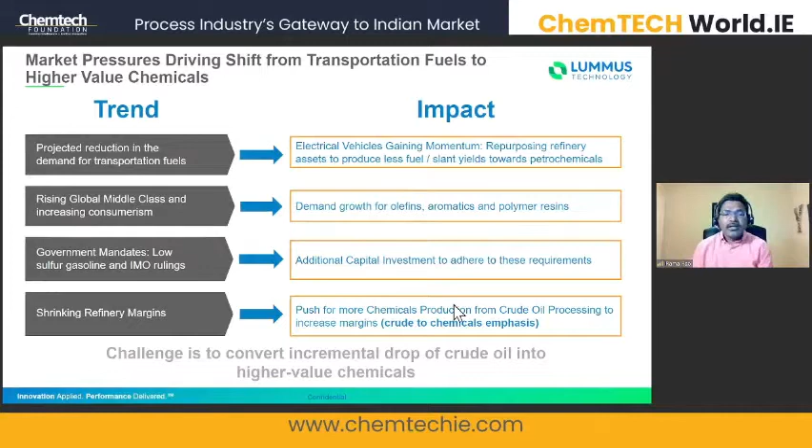So it is important to move towards producing chemicals from crude, which will help enhance the profitability of an existing refinery complex. However, the challenge is to convert the incremental drop of oil into high value chemicals. There are various issues that we need to take into account. The question of refining and petrochemical integration has to be seen in synergy, because we have to repurpose the existing refinery assets to provide petrochemicals that are high value for the refiners.

So great integration doesn't mean co-location. There are a lot of things to be taken into account, such as low cost feedstock, lower transportation costs for feedstocks, fuel sources, existing infrastructure, and downstream markets like polyethylene, polypropylene, etc. Also complementing refining and petrochemical integration by exchanging molecules for reprocessing, and providing some opportunity to share the required utilities.

There are two anchors for oil to chemical projects, known now through a lot of publications and leading conference discussions. One is carbon rejection, the other is hydrogen addition. Carbon rejection means it is mostly the FCC as secondary processing, which you are seeing on the left side. The feed is prepared from the crude unit, from the HVGO to the naphtha to the atmospheric tower bottoms, including treating some residues and processing the coker oils either directly or hydrotreated, making them into light olefins.

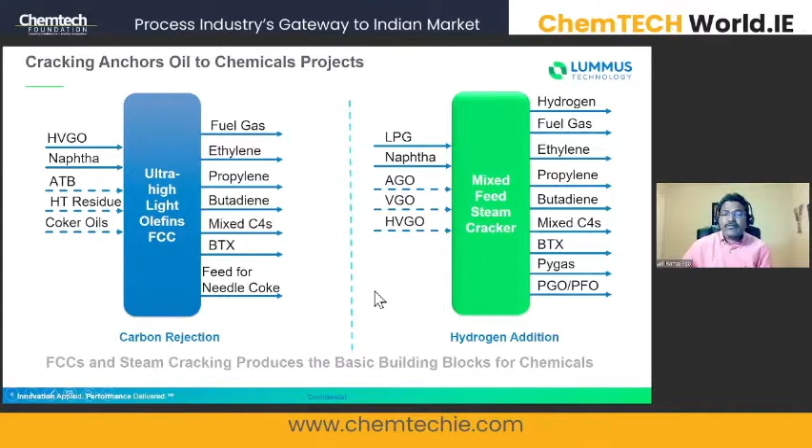It is very important to have a deeper understanding of the molecules. Earlier we used to talk about the range of the products, like gasoline and diesel boiling ranges. Now we are talking about the refinery and petrochemical complex in terms of the molecules, small molecules in particular, starting from C2 to C4, and also the naphtha or pyoil. The naphtha means BTX-rich naphtha that I'm referring to. Many of the processes are licensed by Lummus Technology in this domain as well.

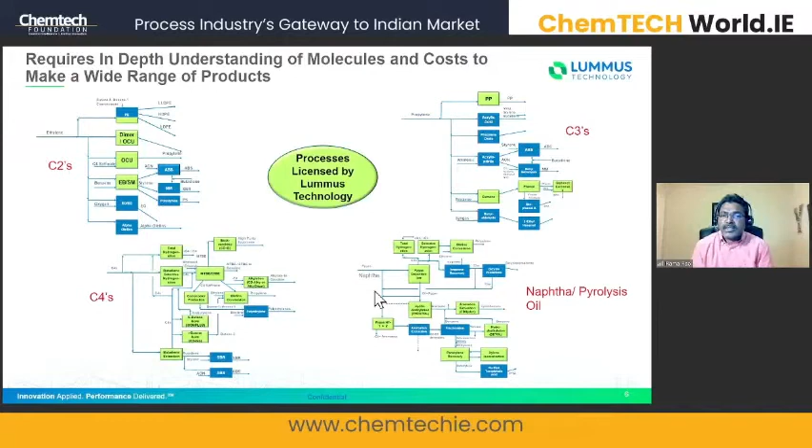The other important consideration is the feed, which is the crude source and type. All crudes are not equal to be processed as a source of petrochemical production, because paraffinic and light crudes are preferred, and access to sustained light crude availability for a long time is a very important aspect to be considered for profitable margins continuously. Regional crude and product pricing mechanisms and logistics are another aspect that has to be taken into account.

As regards the impurities, when we process these crudes, impurities such as Conradson carbon, metals, sulfur, and nitrogen are going to play a big role in the profitability of the refinery and petrochemical complex. Therefore, it is important to effectively deal with these impurities. We also need efficient dealing with the bottom of the barrel, because depending on the crude type, we may have primary conversion or separation to the tune of 30 to 60%. The remainder has to be upgraded into these light molecules. That makes it a big challenge to make it more profitable.

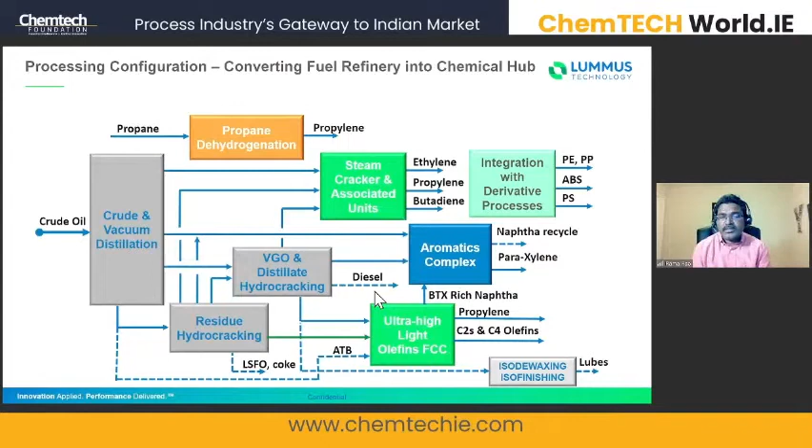This slide is a recap of the previous slide, where the refining complex is typically associated with two types of secondary processing: one is hydrocracking or hydroprocessing, the other is FCC. Another important aspect considered is the residue conversion approach, depending on the type of crude, the byproduct values and synergies between these processes. So it is important to consider residue conversion approaches to make refinery integration to petrochemicals more attractive.

On the right side, you see the petrochemical additions. As we saw in the previous slide, the light olefins FCC and mixed feed crackers are the anchors essential to produce these light molecules for the chemicals, including the feed preparation for these two units. As we are talking about a large range of molecules as feed, some intermediates will be generated, and there could be some waste streams. It's important to monetize these co-products using processes that complement the refinery and petrochemical complex. One such process is olefin conversion technology, which uses C2 and C4 light olefins in a metathesis reaction to produce a higher amount of propylene, for example.

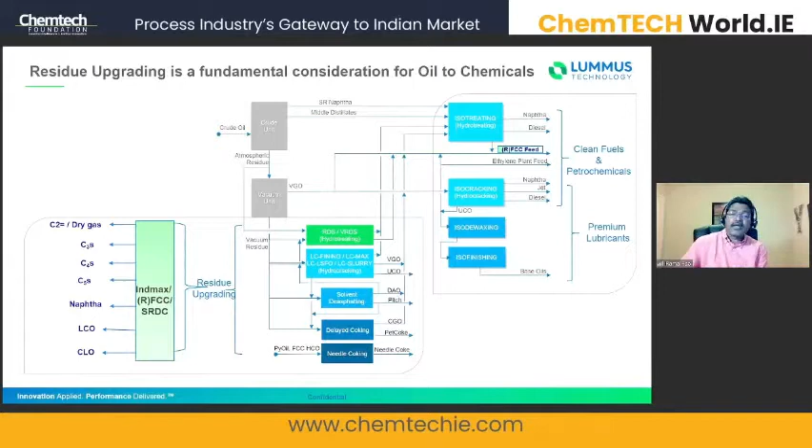As I mentioned, whatever crude that we get, no matter what we do, there is a significant amount of the residue that is still available, and that needs to be upgraded. So therefore, the secondary processing and upgrading all those heavy molecules into the suitable feed, either into the FCC or into the steam cracker, is going to become an important activity that makes things lucrative for the refiners.

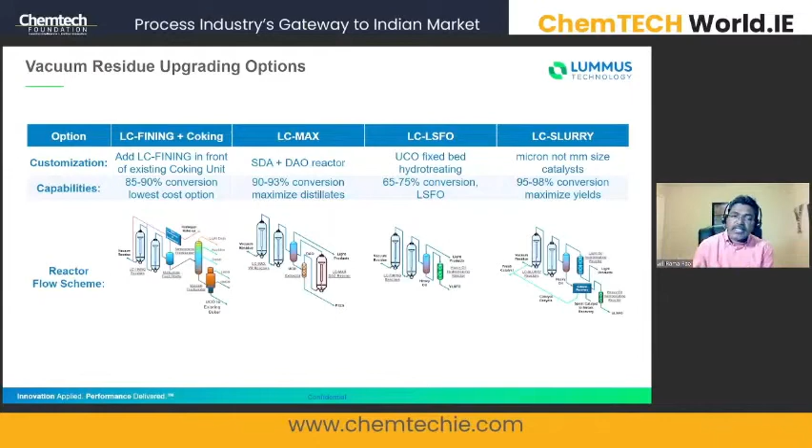So there are a couple of options here for upgrading the vacuum residue into the light olefins. This includes LC-Fining, coking, LC-MAX, several things, ranging the conversion from 85 to 98. The other route that we were talking about is the carbon rejection, where the ultra high light olefins FCC is involved.

Lummus is one of the leading licensors in FCC technology, and in high olefins FCC technology in particular. We have about 70 units licensed around the world. We have active R&D with state-of-the-art pilot plants. We have a joint collaboration with IOCL R&D, the technology partnership for the INDMAX FCC.

Many of you may be knowing the INDMAX FCC was originally developed by IOCL R&D, and we, Lummus, collaborate with them for global licensing as well as design and engineering support. So IOCL R&D brings in the innovative INDMAX catalyst that is developed indigenously, along with the process concepts that are employed in the FCC technology offered by Lummus, with the design and engineering know-how, and we are at the forefront in licensing

of this technology. And I'm glad to indicate that we have about 10 units licensed so far, and 6 since 2018. The point I want to emphasize here is the industry is going from a refinery making gasoline from FCC into producing a very large amount of light olefins, such as propylene, ethylene, and butylenes, as well as high aromatic naphtha that is important for the aromatics complex.

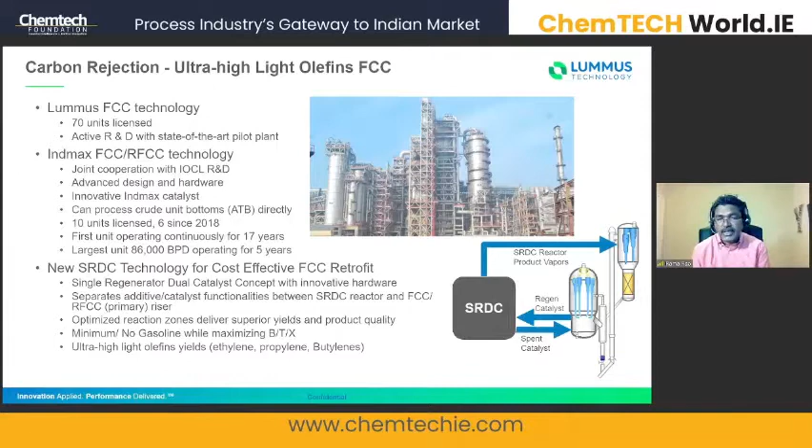In the secondary riser, which is the SRDC riser, ZSM-5 is the primary catalyst, and it is concentrated there to enhance the product yield and selectivity from the SRDC, which is processing gasoline or naphtha as the recycle from the primary FCC. So this enables us to optimize the reaction zones to deliver superior yields and product quality. And this is a mission that will minimize gasoline and maximize the light olefins and BTX-rich naphtha stream.

The other aspect that Lummus has been working on for several years is the crude to chemicals, TC2C. It is basically a partnership along with Saudi Aramco and CLG, our own joint venture. The focus was developing, commercializing, and marketing innovative crude to chemical technologies using hydrogen addition as the platform. The combination involves hydroprocessing by CLG, ethylene cracker technology by Lummus, and the proprietary TC2C technology by Aramco. The objective is to produce high value chemicals by minimizing operating and capital costs.

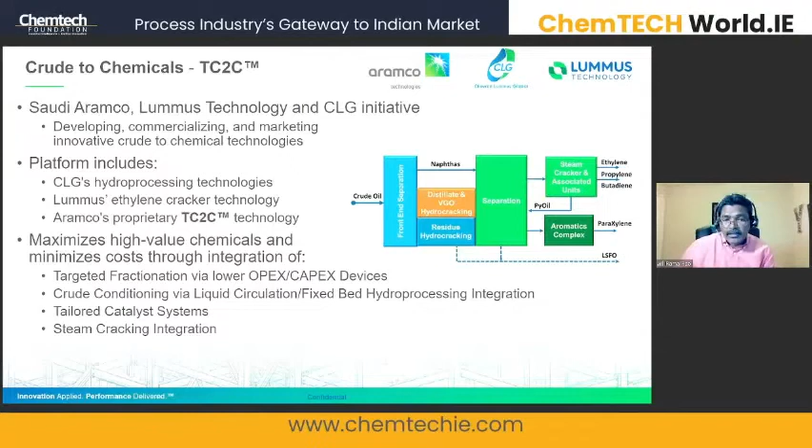At the same time considering crude conditioning with a simplified configuration, tailored catalyst, and steam cracking integration. These kinds of configurations have been implemented, and we are continuing to develop more to make it more cost effective. This is going to play a big role in that endeavor.

Before I get to the conclusion, Lummus is responding to these needs through innovative solutions for converting crude into petrochemicals, and driving solutions to convert residues to chemicals is a challenge we have always been working on. We are supported by 4 R&D centers around the world and excellency centers as well, and there are new configurations to provide improved yields.

Low cost and high chemical yields are achieved through the things I mentioned: carbon rejection and hydrogen addition. The TC2C is one of the hydrogen addition options, and expanding conventional technology applications into new areas, SRDC is one of them. Shifting gasoline to light olefins and BTX is also a prominent research area that we took up.

We have commercialized the technology with one of the leading US refiners, who is fuel focused as of now, and is moving into large scale petrochemical complexes.

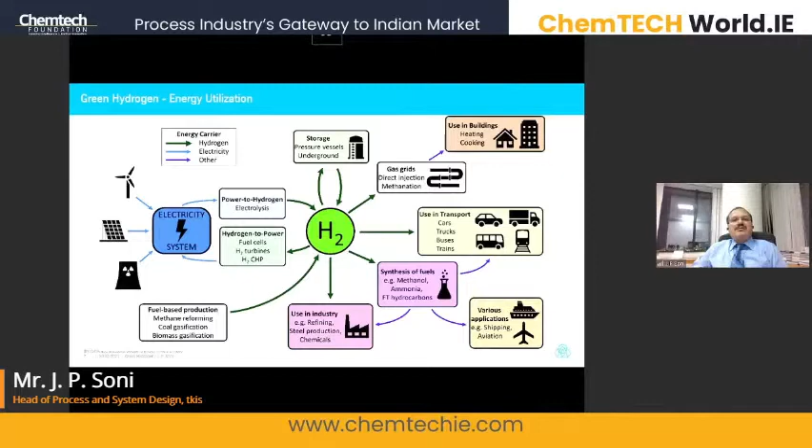And as explained in the opening remark by Mr. Jain, in India also the government is taking a lot of initiative to facilitate this green hydrogen. Worldwide, this hydrogen can definitely act as an integrator of renewable power to the end user, either in the form of direct consumption, or in the form of various chemical production. And the support coming from various government agencies will definitely make this possible in terms of utilizing this green hydrogen, I'm sure.

In this slide, although it is slightly less readable, this is just to depict the whole value chain of hydrogen, what all we can do. Just to explain in brief: as this is a renewable energy source, we can produce hydrogen either centrally, in the areas where abundant renewable energy is there, or in situ at the various chemical complexes. This hydrogen can be supplied for processing to the various industries.

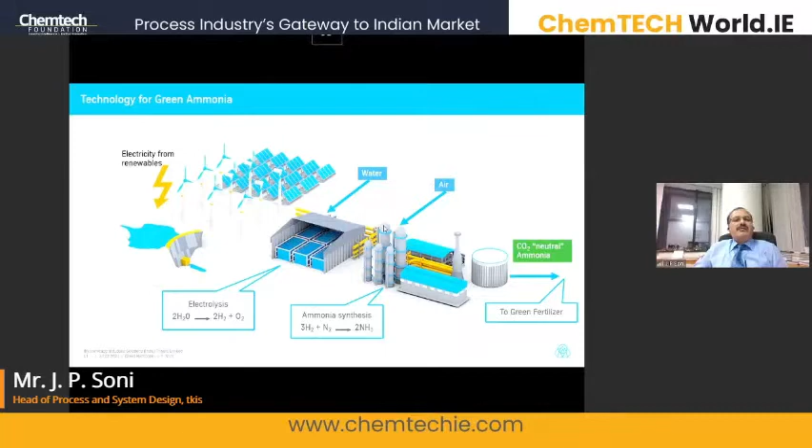Coming to the various technologies of producing green hydrogen through water electrolysis, there are three major technologies available worldwide. First is alkaline water electrolysis. It works on the principle of circulating alkaline water to the cell, which is separated by a membrane. So you separate hydrogen and oxygen into different compartments, and the alkaline water is circulated back to the cells after enriching.

Similarly, there is another technology called Proton Exchange Membrane, or PEM technology. It splits the water by passing it through a proton conductive solid polymer, splitting the water directly into hydrogen and oxygen. There is a third technology which splits water in the form of steam. The steam is passed through the catalytic converter, so high temperature electrolysis happens here, and we get hydrogen and oxygen.

So these three major technologies are different in terms of handling the electrolyte, the cell design, and how the separation of ions in the form of oxygen and hydrogen is done. So this is how they are different.

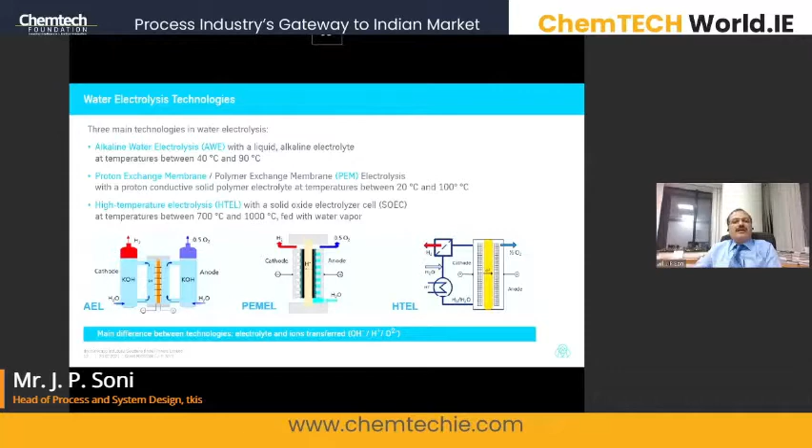Just to give you an example of one of the processes, the ThyssenKrupp technology: ThyssenKrupp Uhde Chlorine Engineers has developed it based on wide experience with world-leading chlor-alkali technology, where chlorine and hydrogen along with caustic soda are produced through the electrolysis of NaCl brine. Based on that experience, we have developed the module for alkaline water electrolysis to generate hydrogen. This is the 20 megawatt module.

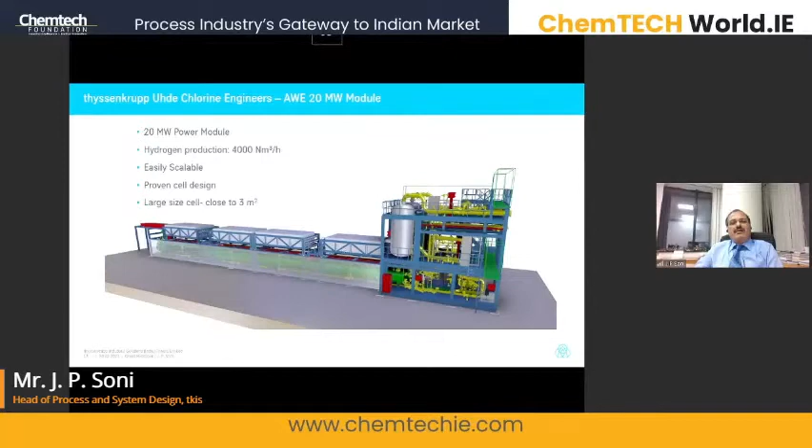So in one module we can utilize 20 megawatts and produce about 4,000 cubic meters of hydrogen. These cells are quite large, close to 3 square meters in size, so we need a lesser number of cell elements compared to smaller electrolyzers. Just to give you some more brief features about this electrolyzer, it consumes about 4.3 kilowatt hours per Nm³ of hydrogen production.

And the hydrogen which is generated in this electrolysis is quite high purity, 99.95% purity, which can be further processed, based on the need, to 3 digits of decimal by a deoxo unit. This is very reliable technology which has a life, based on the experience with chloralkali, of more than 30 years. And this complete module comes skid mounted so that it can be installed directly at site.

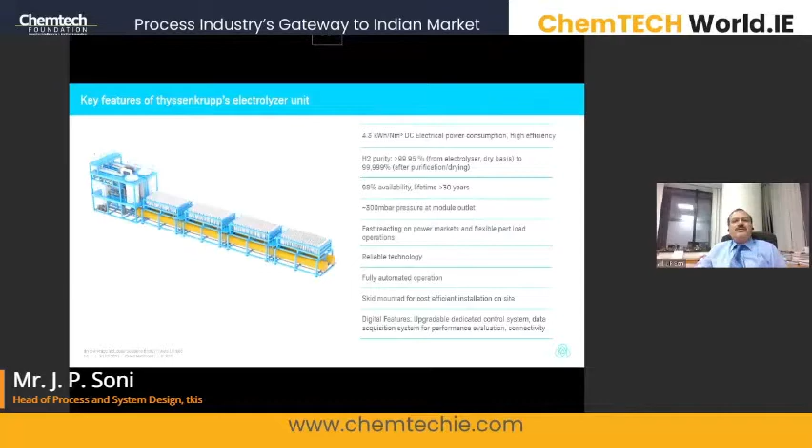And the most important thing for any such electrolysis, when we are utilizing it along with renewable energy, is the flexibility in the operation. So when the demand, the production, is varying from 0% to 100%, these electrolyzers also can be operated from 0% to 100% of electricity load easily. And these are all very scalable, I will say.

So just to show you the layout, the picture. The cells which are stacked as a module can be expanded in this direction. So if we want to add capacity in future, it can be easily expanded, and the downstream connected along with it also can be easily expanded. So scalability gives the economy. So 20 megawatt can be easily expanded to 2 gigawatt level also. So not an issue.

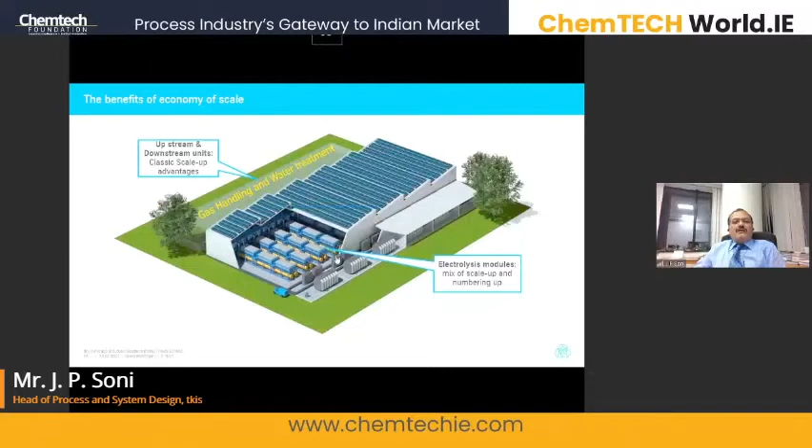So this was the technology part, and just to give you some real life example, there are a lot of efforts being put in Europe, and one such example is in Germany, where ThyssenKrupp installed this 2 megawatt module in one of the steel plants as a demonstration, in partnership with the government. This 2 megawatt module was producing hydrogen by water electrolysis, and the hydrogen produced was combined with the synthesis gas coming out from the steel mill. And this is used to produce methanol and ammonia.

Of course, this was small scale because it was a demonstration plant, but it was already started up and commissioned in Germany. And based on the success of this, Germany has now announced one big project in the Hamburg area, which will be installed in 2 phases, where the hydrogen is produced by electrolysis utilizing wind energy, and this hydrogen, along with the emission from the nearby cement industry, will be combined to form methanol, and this methanol is further processed to make aviation fuel and various other fuels for the energy demands. So this project is already on, with various agencies involved, along with the government of Germany also.

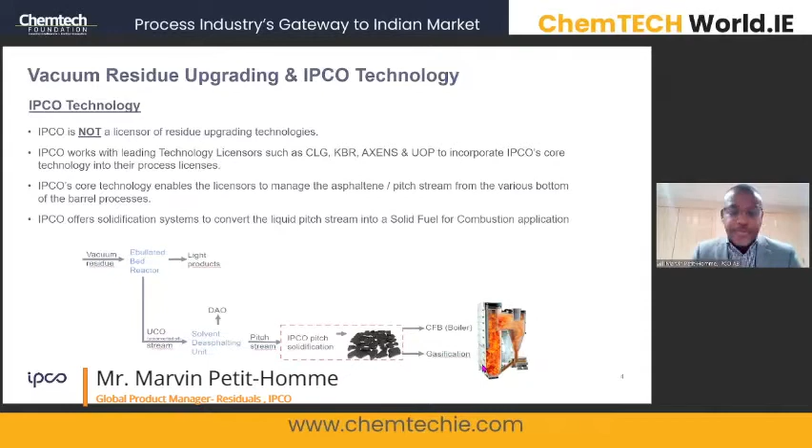So what does IPCO really offer when we talk about these solidification technologies? IPCO offers two distinct technologies to aid our customers in converting the pitch from the various bottom of the barrel processes into a solid form. The first technology that IPCO offers is what we call our double belt technology. The double belt technology is what I like to refer to as a dynamic heat exchanger, where we take the liquid pitch from the solvent deasphalting unit. It is pumped via jacketed piping through a positive displacement gear pump, and from the gear pump through jacketed piping into the heart of our system. Our system is made up of a lower conveyor.

This lower conveyor is cooled by cooling water on the underside, and an upper conveyor, which is also cooled by cooling water on the upper side. In between the two conveyors, what's being driven is a stainless steel belt. The belt is usually 1.5 to 2 meters wide, roughly 1 millimeter in thickness, and is welded continuous throughout the conveyor.

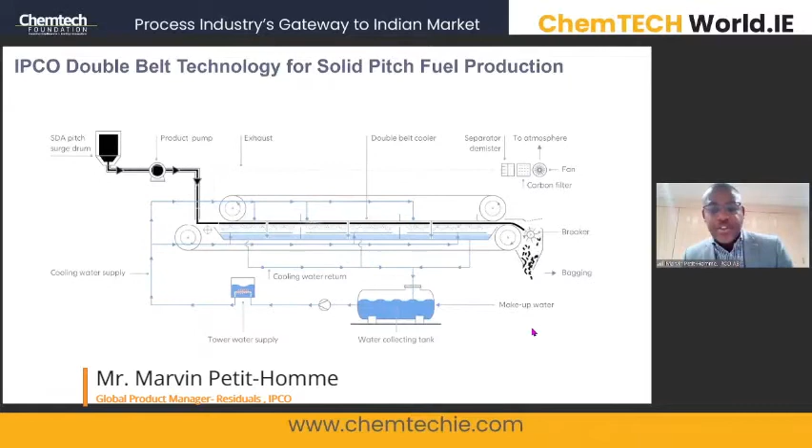As with the previous presentation, these units are very modular, so they are scalable for other or increased capacities. 2, 3, 4, 5 different trains can be added to reach greater capacities required. As I mentioned earlier, the typical size of the pitch is 25 to 50 millimeters, 3 to 4 millimeters thick, with a bulk density of 600 to 700 kilograms per cubic meter.

And one of the things that we'll take a look at later is really the comparison of this pitch product to, say, coke, for example. When you take a look at burning coke, the calorific value for burning pitch is much higher than coke. So this technology, in some instances, where appropriate, can actually be used to replace coking, meaning the combination of pitch solidification plus solvent deasphalting is a reliable combination that can be used to replace coking. And we'll go into the reasons why later on.

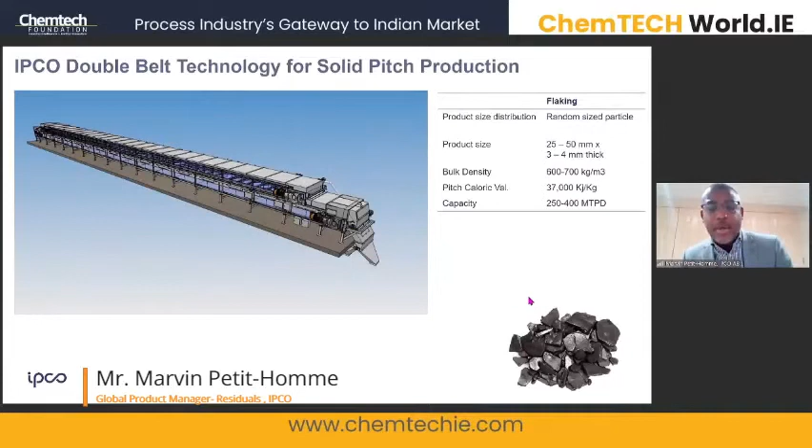As I mentioned earlier, IPCO has 2 technologies. The second technology is very similar in that it is based on utilizing a stainless steel belt, as I said earlier, dynamic heat exchanger, to actually solidify a product.

Like the flaking technology, basically the pastillation technology starts with upstream equipment. You'll have product in a molten tank, and it is pumped through jacketed piping via a positive displacement gear pump, through filters, but into a portioning system.

The difference between the flaking process and the pastillation process is that we're utilizing a different feed device. Instead of putting down a sheet on the actual belt, we're portioning out through a rotary depositor individual pastilles or pellets onto the moving stainless steel belt. As the pastilles travel down the belt, they solidify and cool in the same manner as the previous process.

And the pastilles travel down the length of the belt, and they fall into the packaging system or material handling system. Again, the biggest difference with the pastillation technology is that we are producing a free-flowing particle of a specific size, typically between 5 to 8 millimeters in diameter, roughly about, say, 2 to 4 millimeters in height. So this is a very consistent size particle with a higher bulk density than the flake application that we previously discussed.

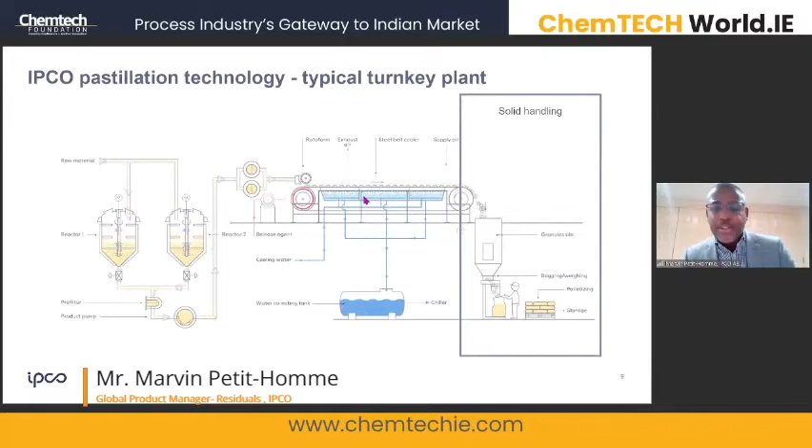Well, one of the biggest differences between these two technologies is the capacity. Because with the double belt unit, you're cooling the product from both sides and using the maximum surface area on the belt to cool, the capacity typically is roughly 250 to 400 metric tons per day for a machine that's, say, 1.5 meters wide to 40 meters long. And on the same machine, the capacity for the pastillation will be roughly about 50 to 100 metric tons per day.

Another key difference, and I won't go into every single point because of limited time, another key area when it comes to handling the pitch from the various bottom of the barrel processes is we have to have a good indication of what the softening point of the pitch is. The softening point really dictates a number of these process variables in terms of what cooling water temperature we need and what is the required pitch discharge temperature, because as you can imagine, at a higher softening point, you can discharge the product at a higher temperature, so therefore the capacity actually increases.

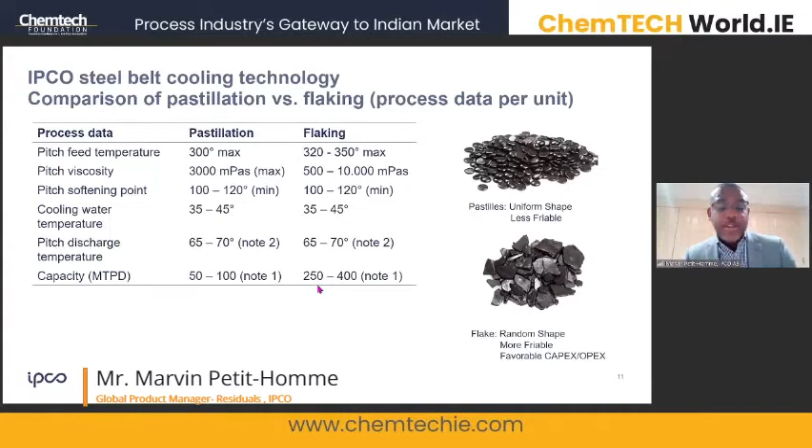Okay. And one other thing that I'd like to add: when you see the capacity difference, as you can imagine, there will be a significant OPEX and CAPEX advantage to go with the flaking for a plant, because it will take fewer units or fewer trains to reach your targeted capacity.

As I mentioned earlier, as we talk about crude to chemical processes, IPCO is pleased to be part of the first COTC plant in China. This plant was for Hengli Petrochemical. And with the Hengli Petrochemical process, IPCO was receiving the pitch from a solvent deasphalting unit. The unconverted oil stream was coming to the SDA unit from an ebullated bed reactor.

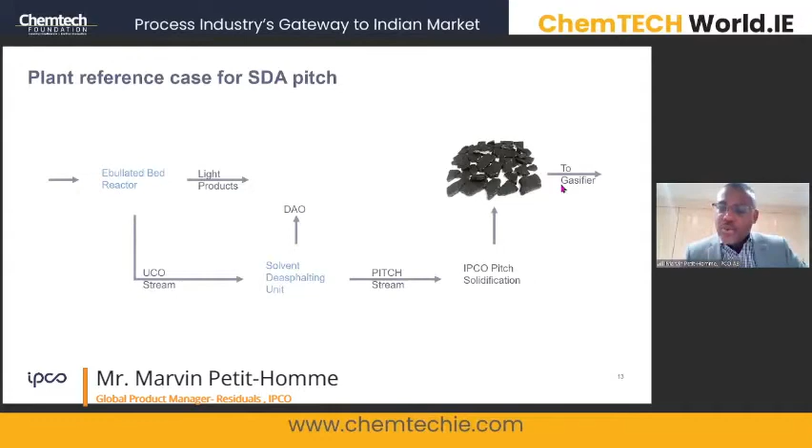And from the solvent deasphalting unit, the pitch stream was sent to the IPCO solidification, and the DAO was sent to the upstream process. From the IPCO pitch solidification system, the flake was actually sent to a gasifier that was on site.

And if we take a look at the overall project, this is basically a snapshot of the pitch solidification area. What you're seeing here is basically 14 IPCO flaking units to flake roughly somewhere about 2,500 to 3,000 metric tons per day of pitch.

The IPCO scope of supply included 12 plus 2 units, meaning 12 operational plus 2 standby units, the liquid pitch feeding system, the cooling water system that I explained in the previous slides, the exhaust system, the pitch product breakers, and the pitch solidification conveyors.

As you can see, all the plants are installed on the rooftop with an open-side building, and each plant basically is parallel to each other, with a man in the middle of the 2 units. This plant was basically installed in 2019 and became operational in 2019.

To summarize, the IPCO process is not a standalone process. What we're presenting today is basically the pitch solidification in combination with a solvent deasphalting unit. From our perspective and the global projects that we're working on, this combination of pitch solidification plus solvent deasphaltation is really a compelling solution that should be considered for the various residue upgrading schemes.